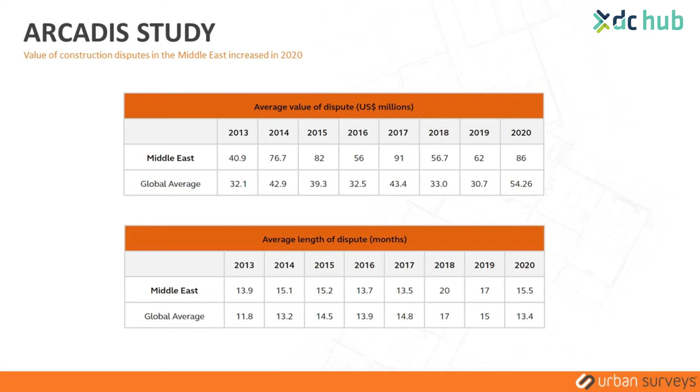And the next question is, would anyone guess how much time it takes to resolve a dispute on average in the Middle East? That as well is not a few months. In 2020, it's almost a year and 4 months, and that's 15.5 months. So really, we're trying to avoid all of that. It's a massive cost, and it's a massive waste of time.

And you'd rather invest that time and money elsewhere. Now we're looking at the stakeholders that can be involved in reality capture to make use of it and avoid the claims all in all. In this room, I'm pretty sure one of these stakeholders mentioned here is going to be you guys. So that's facility managers, architects, designers, contractors, engineers, fabricators, and owners, more specifically.

Each one of these can use the accurate data of reality capture to avoid claims, or in worst case scenarios, to resolve them if needed. And that can be used in one of these ways: using it for procurement, using it for progress monitoring, using panoramic images, for example, and monitoring the progress so that you have a journal image, and you can also tie it in with the progress payments as well. You can use it for inspections, you can use it for planning at an early stage, and you can use it for mitigating risk all in all.

So the end goal is claim avoidance or claim resolution.

We all know that typically people survey using traditional methods, and I would ask the question of how many people here still use traditional methods. My assumption would be that a lot of people are still using that, but this is to show you the value of reality capture against traditional surveying methods, which use a laser pointer or a tape measure.

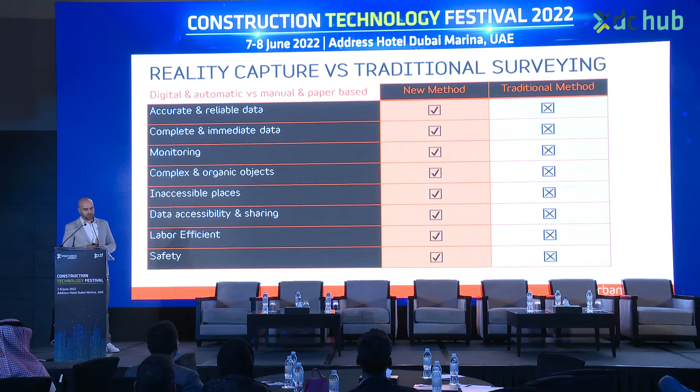And again, it gets you to inaccessible places, which are otherwise impossible with traditional surveying.

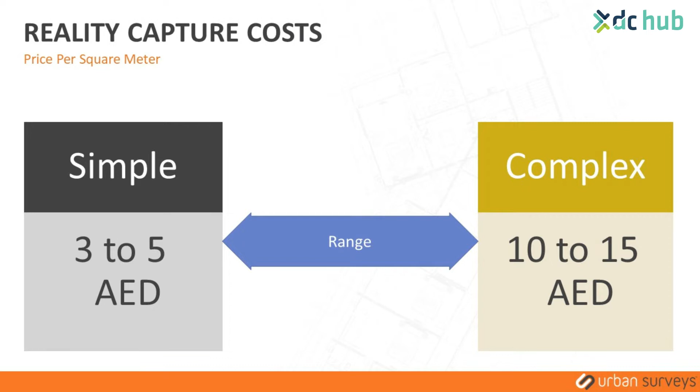The other misconception that people usually have is that reality capture or laser scanning technology is expensive, so people would rather avoid it. I'm showing you here why this is actually affordable.

These are the reality capture costs, the price per square meter based on 4 sample projects we've done, from simple—laser scanning, surveying and processing the data—up to complex, which includes scanning, processing, and modeling of multiple disciplines. As you can see, this turns out to be really inexpensive: 3 to 5 dirhams per square meter for simple projects, and about 10 to 15 dirhams per square meter for complex ones.

This is to be taken just as an example, so you can understand that it's really efficient and inexpensive. The range changes based on the requirements.

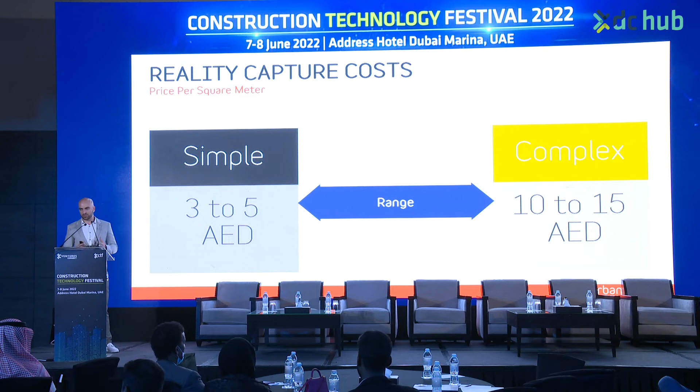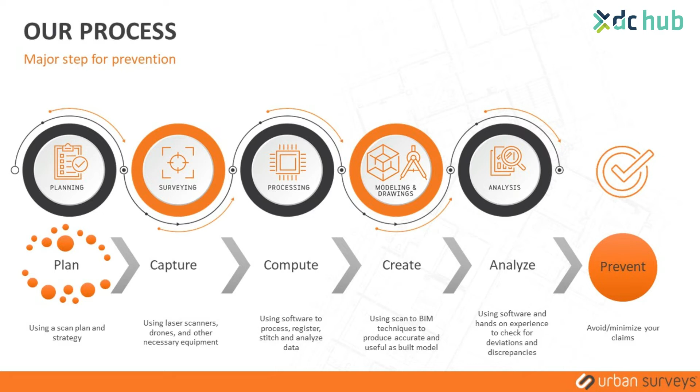The process for preventing claims with reality capture starts with planning, then we capture the data, process the data, and create the information needed for prevention of claims. In some cases it's drawings or a model, in some cases a photographic journal that you can view nicely online and see dates, and in some cases it's analysis. Whatever that format is, it's going to allow you to prevent claims.

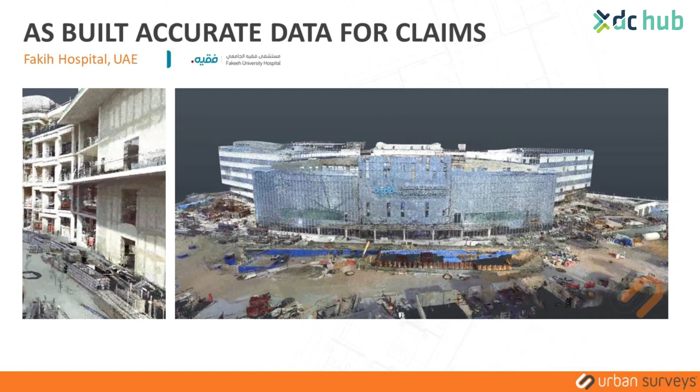Let's look at some examples, starting with the Fakih Hospital in the UAE. The client literally wanted us to do reality capture and capture the data for claims, to use as evidence in case a claim comes up. A contractor stopped working on the project and another contractor came after. A scan was done in between, which took about 6 weeks, giving them the data they need to go back to in case a claim happens.

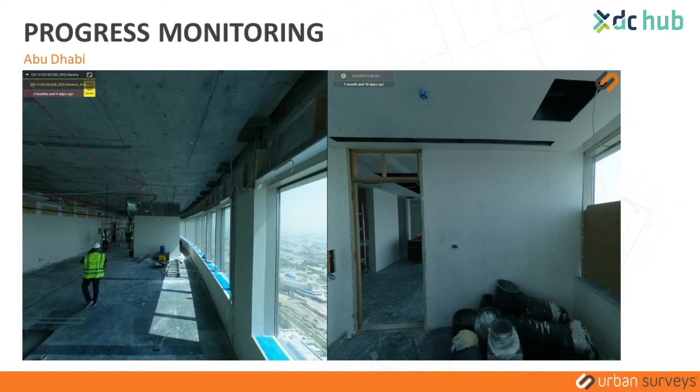Another example is a project in Abu Dhabi, for progress monitoring. You see 2 images taken in the exact same spot, at the exact same angle, but each taken on a different date. Imagine the contractor claims, 'I did the MEP works, I did the duct work, I did the firefighting.' With progress monitoring, you can look at that image and in fact see there's no mechanical works as the contractor is claiming.

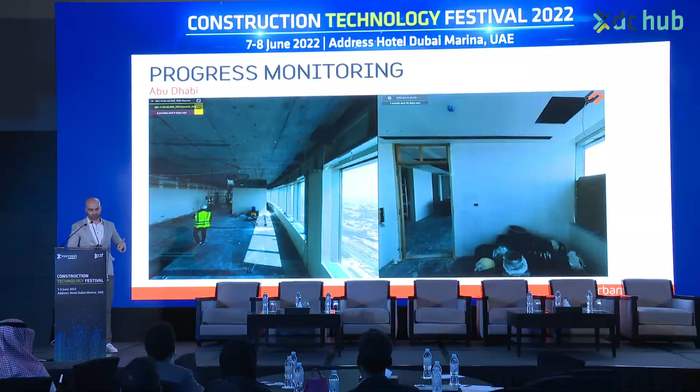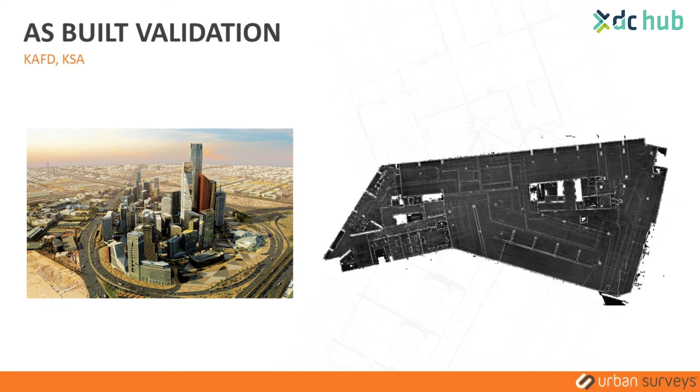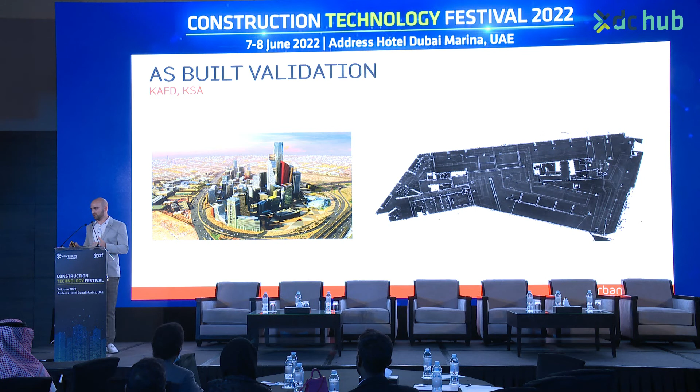The final example is a project in KSA, KAFD, where we scanned around 500,000 square meters. The client needed this data for the QS team to determine the cost to complete the project, and for the design team to understand if site conditions matched the design intent. All of that serves one purpose: to avoid claims in the future.

So with that being said, do you think you need more evidence of the value of reality capture? This slide is going to be a summary of the major benefits already found in previous slides.

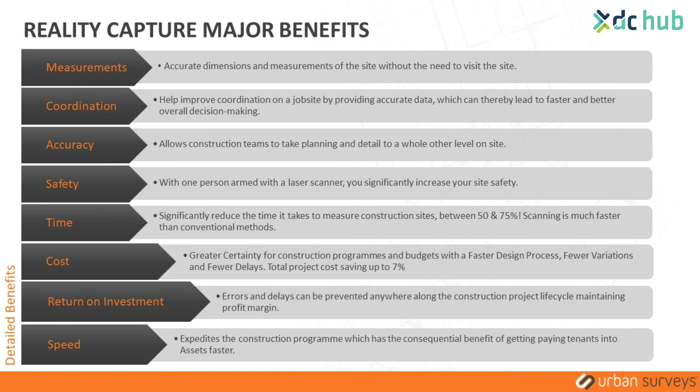Reality capture gives you accurate measurements that allow for better coordination and overall decision making, and it's completely safe. One person can scan a building with one device, saving you time between 50 to 75% versus traditional surveying, and giving a total saving on project cost of up to 7%. If that's a big project, that's a massive value.

And all in all, it's going to give you a return on investment and maintain your profit margin.